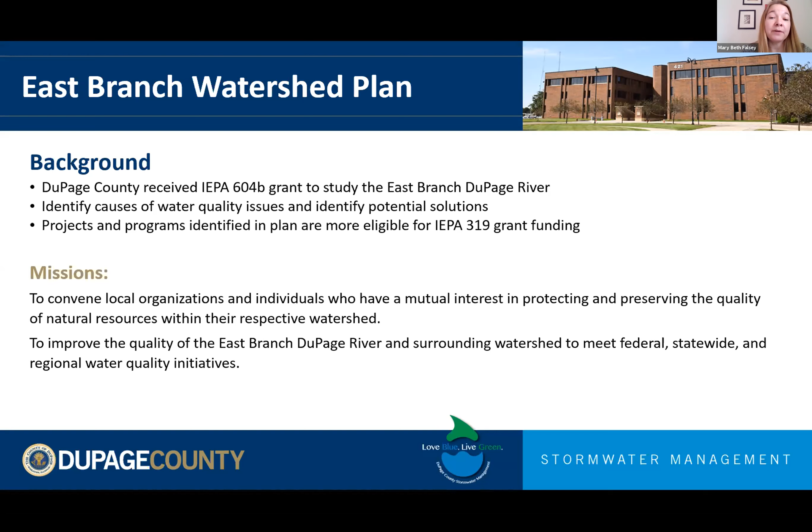Now, these projects and programs identified in this East Branch Watershed Plan will be more eligible for 319 grant funding. The mission of all of our watershed plans is to convene local organizations and individuals who have a mutual interest in protecting and preserving the water quality of natural resources within their respective watershed. Specific to the East Branch Plan, the mission is to improve the quality of the East Branch DuPage River and surrounding watershed to meet federal, state, and regional water quality initiatives.

The plan should involve an educational component. We track the progress of the plan implementation by using a project schedule with milestones and indicators. There's also a monitoring component moving forward to ensure that the plan is providing a benefit to the waterway.

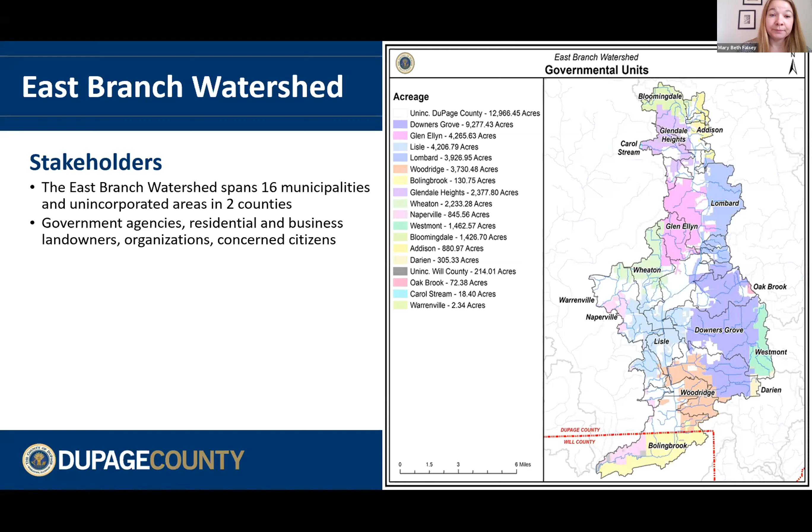So here is a map of the waterway itself. It flows generally from a north-south pattern through DuPage County into Will County. The East Branch DuPage River meets up with the West Branch DuPage River in Will County, and then the DuPage main stem eventually flows to the Des Plaines River.

So the EPA has identified causes and sources of the East Branch impairment, which I'll go over in the next few slides. But the watershed planning process also involves conducting intensive field investigations to gather information on additional causes and sources of the impairments that may not be listed in the EPA's inventory.

This is achieved through conducting field inspections along streams, any lakes that are identified, and detention ponds, as well as conducting outreach to stakeholders who live and work along the stream system and the overall watershed. We also conduct water quality modeling to estimate the pollution from stormwater runoff, as well as the reductions that can be provided by any potential projects or solutions.

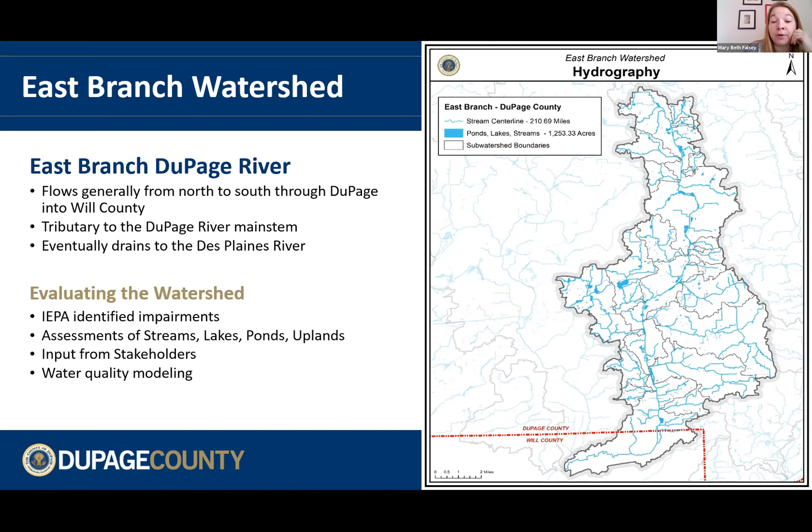So we look at the watershed in components, in smaller components. It gives you a better scale to look at things from a detailed perspective. The EPA had divided the main stem into segments or sections for evaluation purposes, so we use those same segments in our inventory. Again, we also look at each sub-watershed or tributary individually. So those are shown here as well.

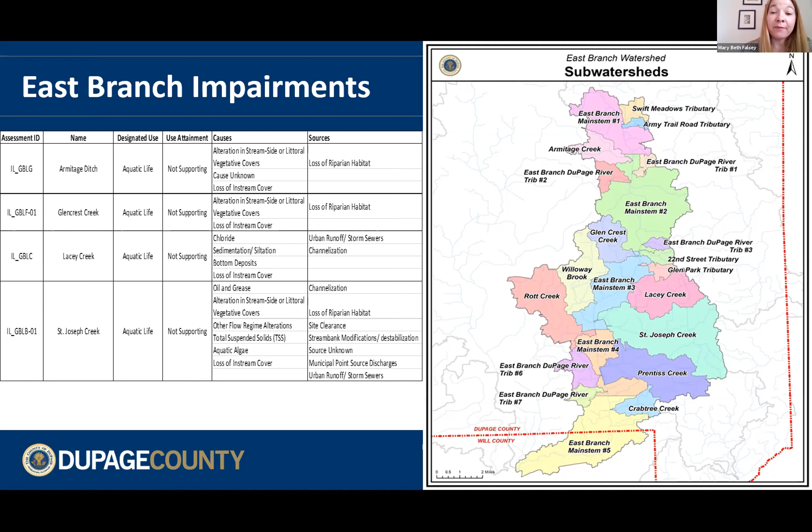So I keep mentioning the stream assessments—I'll go into those a little bit more. We're scheduled to conduct a thorough stream assessment of the East Branch and the tributaries in summer of 2020. This includes an inventory of stream conditions such as erosion, channelization, and sedimentation, as well as an assessment of the size and condition of the riparian corridor, and a habitat inventory.

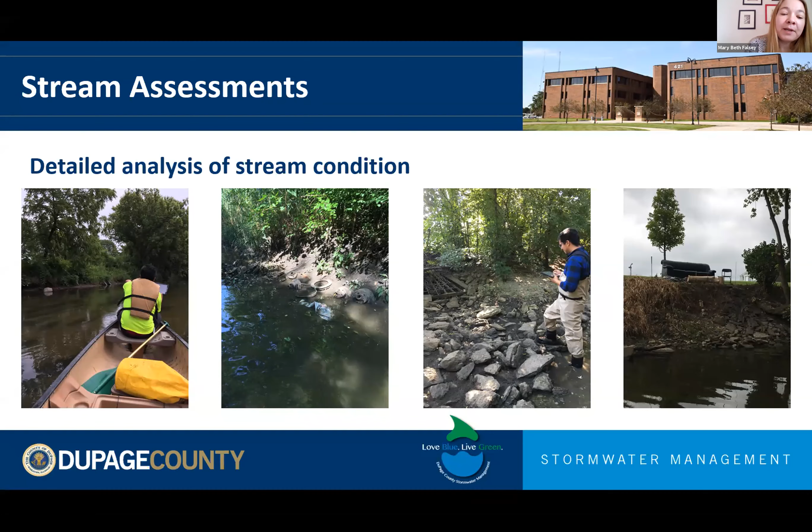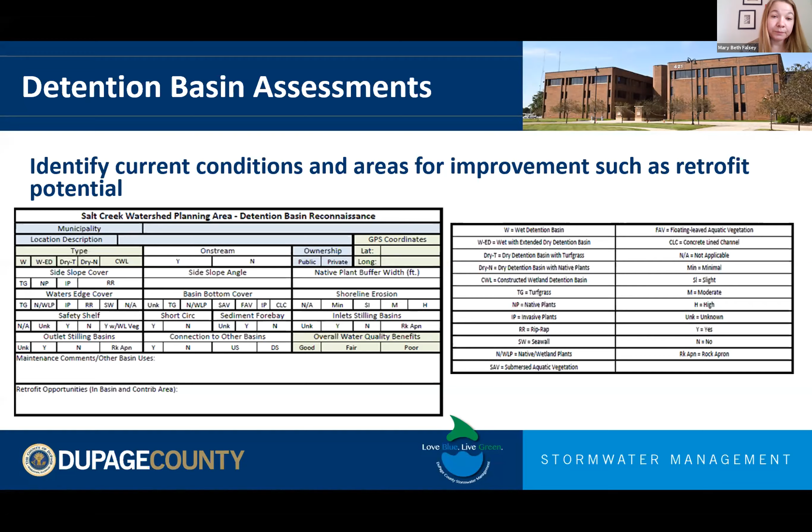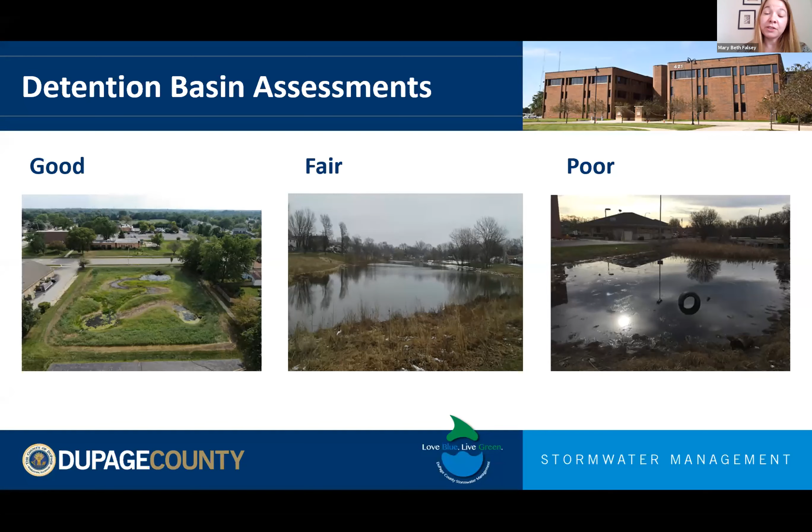Now on the other end of the spectrum, we have the poor quality basin on the right. A poor quality basin may have severely eroded shorelines contributing sediment, it could have garbage accumulation as you see here, or it could be vegetated with only turf grass, so you don't have a lot of interaction with the stormwater and the vegetation, and pollutants are not removed.

The Citizen Reporter app is another way we gather information from our stakeholders. We have had this Reporter app in use for several years now, and we promote it in particular for our watershed plans to gather more information throughout the county. It's an online and mobile application to submit stream reports directly to DuPage County.

If you're reporting from a mobile phone, you can actually geolocate and report something. If you're on a walk, for instance, and you notice something, you can report it from right where you're standing. On a computer, you can enter an address or click on the map to identify an area. You can attach photos, and these reports go straight to DuPage County Stormwater Management.

In some cases we will address reports immediately, like a stream blockage or an illicit discharge that's causing an issue. For other reports, if it's erosion, we can include that in our watershed plans. We keep that data in a database and include it as an issue to be noted, such as an eroded stream.

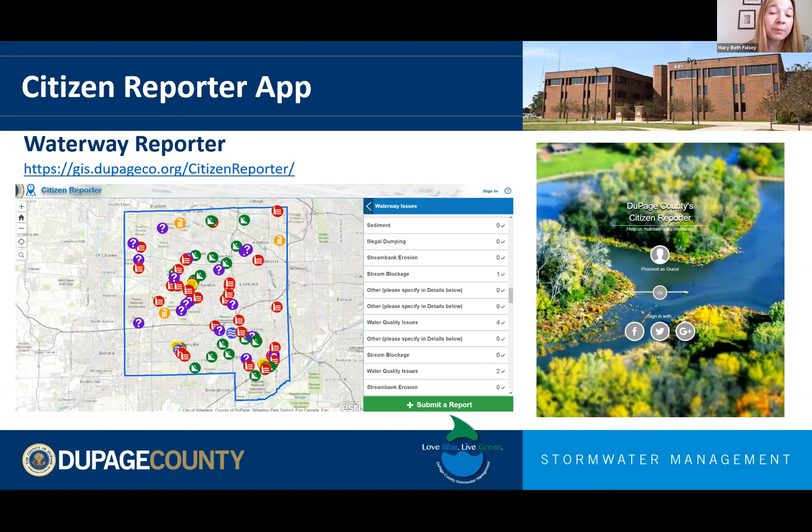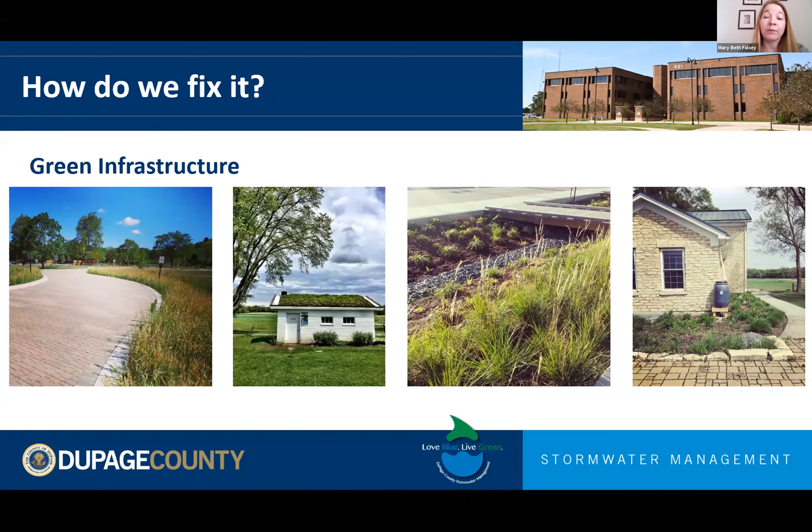So now that we've gathered all this information, how do we fix it? Possible solutions to water quality impairments can include green infrastructure in upland areas. I have a bunch of examples here, including permeable pavers, green roofs, rain gardens, bioswales, and rainwater harvesting techniques like rain barrels or cisterns.

Detention pond retrofits are a great way to turn something that may be a source of pollution into a solution. There are a few different things you can do with detention pond retrofits.

Shoreline stabilization is a good way to address an eroded shoreline, as you can see in this example. Stabilizing those shorelines helps keep the sediment in place. You can replace turf grass basins with native plants, or do a complete conversion to a constructed wetland basin, incorporating water quality features and constructing a complex wetland system at the bottom of the basin.

Stream and riparian restoration projects are another option. As we conduct stream assessments and find problem areas, we can identify areas to implement solutions, such as stream bank stabilization, whole stream restoration projects incorporating micropools and habitat features within the stream, and riparian plantings.

And as I mentioned earlier, it's not just on-the-ground projects—education and outreach should also be included. That can include programs such as storm drain medallions, rain barrel programs, pet waste cleanup outreach, and promoting and educating on native plants.

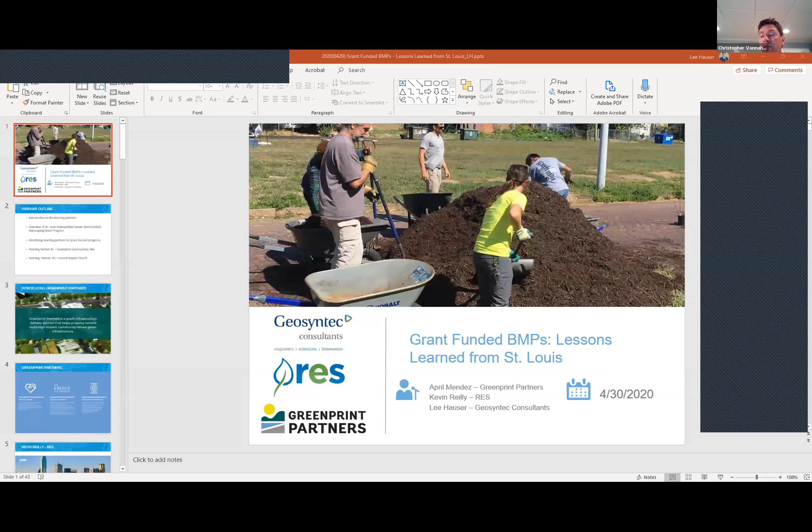Now we're going to turn things over to, looks like we got a trio of presenters for our next presentation, and they are Lee Hauser from Geosyntec Consultants, April Mendez from Greenprint Partners, and Kevin Reilly from Resource Environmental Solutions. And they are going to be telling us about grant-funded best management practices, and these are lessons learned from St. Louis. So guys, take it over. I'm not sure who's going first.

Thank you, Chris. Yeah, I can start. So today's presentation will be a joint presentation with April Mendez from Greenprint, Kevin Reilly from RES, and myself. We're going to talk about grant-funded BMP projects and lessons we've learned from those. Throughout the presentation, we're going to give an introduction to the teaming partners, walk through what all of the different consulting groups can help with, an overview of the St. Louis Metropolitan Sewer District's Rainscaping Grant Program, identifying teaming partners for the grant-funded programs, and then walking through two case studies where we have either implemented and designed BMPs, and the second one is still part of the design process.

April? Hi everybody, my name is April Mendez. I'm with Greenprint Partners, and we are a company based in Chicago that's exclusively focused on green stormwater infrastructure delivery. The aspect of our work we're going to be talking about today is the work we do to help private property owners build green infrastructure that is high impact and driven by their community stakeholders. We are a mission-driven company. We believe green infrastructure can transform communities, so our mission is to build more green infrastructure, better green infrastructure, and green infrastructure that serves all people. As part of that mission, we're backed by the Kresge Foundation through their Urban Equity in Water Systems program, and we are a certified B Corporation, which means part of our corporate structure is that we are focused on impact and measuring our impact.

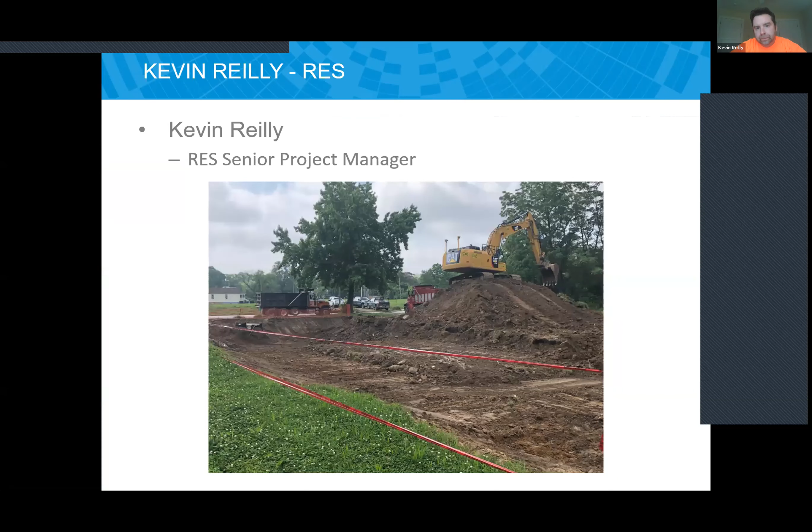Cool. Kind of talking to Geosyntec Consultants, we are an environmental engineering consulting firm. Within that, our group focuses on water and natural resource services, including both stormwater planning and design and Clean Water Act compliance. So we do a range of different types of green infrastructure planning, stream restoration, permitting, combining that with Clean Water Act compliance, nutrient reduction, lake management, and additional wastewater treatment support.

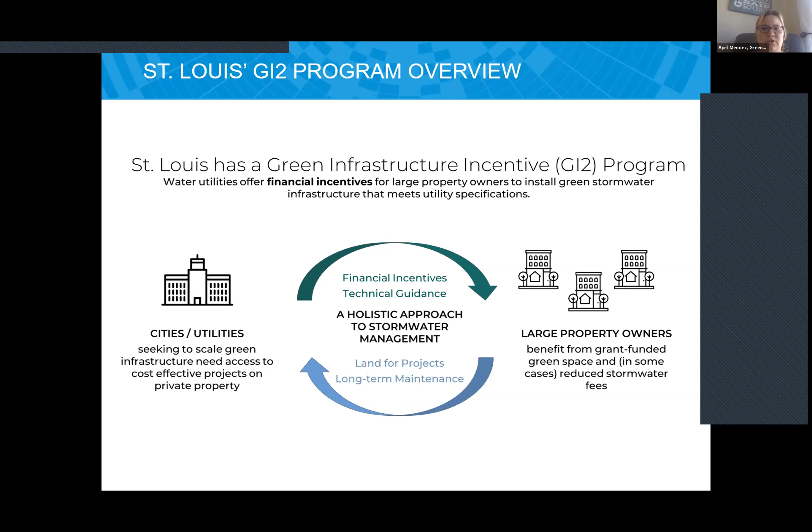So we'll move into an overview of what the St. Louis MSD Rainscaping Grant Program is. The St. Louis Metropolitan Sewer District has a consent decree that requires them to spend $120 million on building green infrastructure on private properties, off right-of-way properties. They have turned a lot of that into a green infrastructure incentive or grant program, a category of programs that exist in a number of municipalities and utilities across the country, where the utility offers a financial incentive to get large and small property owners, including residential, to install green infrastructure on their own property and act as part of the distributed infrastructure network for stormwater management. It's a way to bridge the needs of the utility in terms of providing stormwater infrastructure and the owners of the land assets, and the financial incentive helps bring those two together such that the utility can essentially be building infrastructure on these private properties.

There are lots of cities across the country that have a green infrastructure grant program. The four that are listed here are the most robust of those.

Philadelphia has an annual budget of $25 million provided for green infrastructure grants. That funding may go down this year in a COVID-19 world. They pay somewhere in the range of $150,000 to $200,000 per greened acre, and in exchange for the landowner building the green infrastructure on their site, they get a bill credit on their stormwater utility fee of up to 80%.

In the Philadelphia case, the landowner is committing to build the green infrastructure and then to maintain it for a minimum of 45 years. There's a maintenance easement placed on the deed of the property such that any future buyers would also have that same maintenance restriction. That is something that exists across all of these programs.

In the example of St. Louis, they have $120 million total dedicated to this over about 23 years. It's a kind of a spend-down program. They're allocating about $5 million a year, give or take, and they're not terribly strict on that. Their reimbursement level is about $180,000, but it can go up above that as well. And the maintenance requirement on the landowner is permanent, so as soon as you've installed this, you have to maintain it in perpetuity.

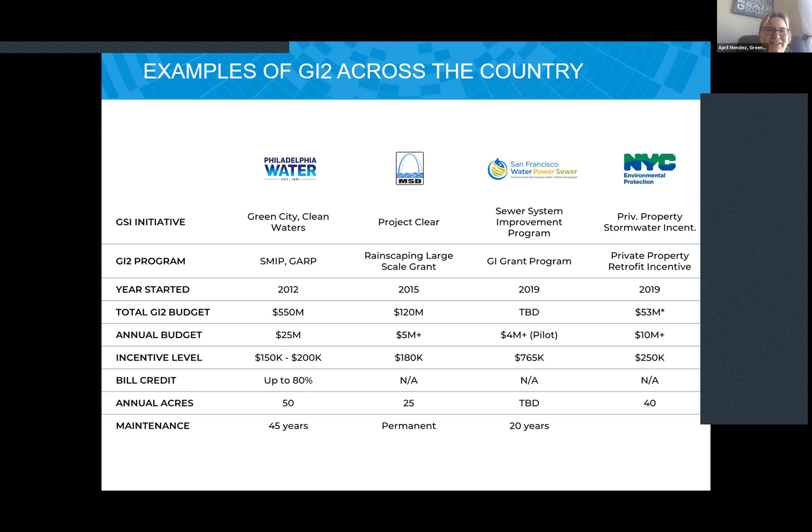New York City also has a private property program. You can see some details of that here. It's about $10 million a year, and they're paying about $250,000 per acre. It looks like I forgot to add the maintenance duration there, so we'll come back to that if you need it.

So then I want to talk about what the role of Greenprint Partners has been in these incentive programs, particularly in St. Louis, though our model is pretty similar in each of the cities we're working in — St. Louis, Philadelphia, and San Francisco at present.

Our role in these projects is, oftentimes, the utility doesn't have the capacity to go out and directly recruit landowners to participate in their grant program. So the folks that come to them proactively are people who already have capacity, who are maybe already planning a project, who already have design engineers at the ready, but anybody who isn't in that position is not going to respond. So we play a kind of middle person role, going out and recruiting landowners, and we particularly bring a focus to low and moderate income communities, given our mission focus.

One of the things we're trying to drive is more equity in the ways investments in stormwater infrastructure are being made, so that those investments go into the communities that will benefit the most or need them most. So we recruit the landowners, then do pretty much everything in terms of getting ready to apply for the grant. The landowner provides input and guidance on the design, and signs off on the requirements, saying this is something they definitely want to do and that they're on board to maintain the BMPs once installed. Then we submit the application on their behalf.

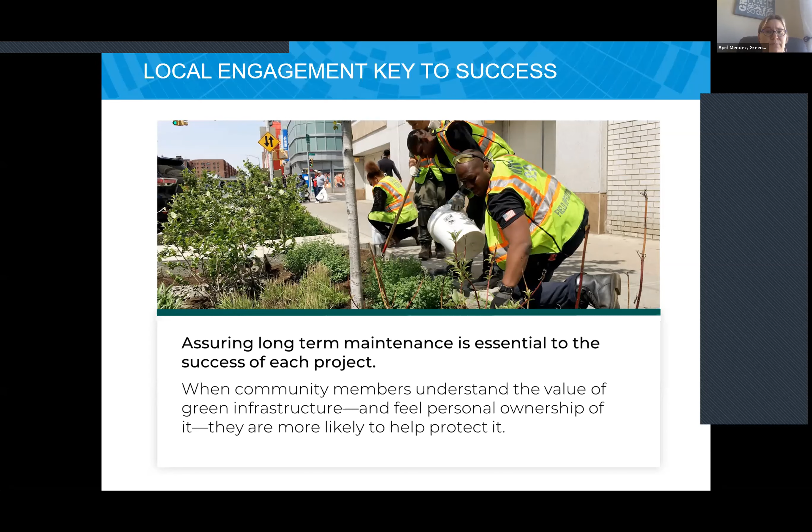All of that leads to a full process in terms of our engagement of stakeholders that starts at the very beginning with awareness building and getting key decision makers and a broader community of stakeholders committed. Then we also do a benefits-driven design workshop - a more in-depth opportunity for not only the landowner, but also their stakeholders, which might mean, in the case of a church, a full congregation - where we'll do education about what green stormwater infrastructure is and a deeper dive into the benefits they would like to see achieved through the design.

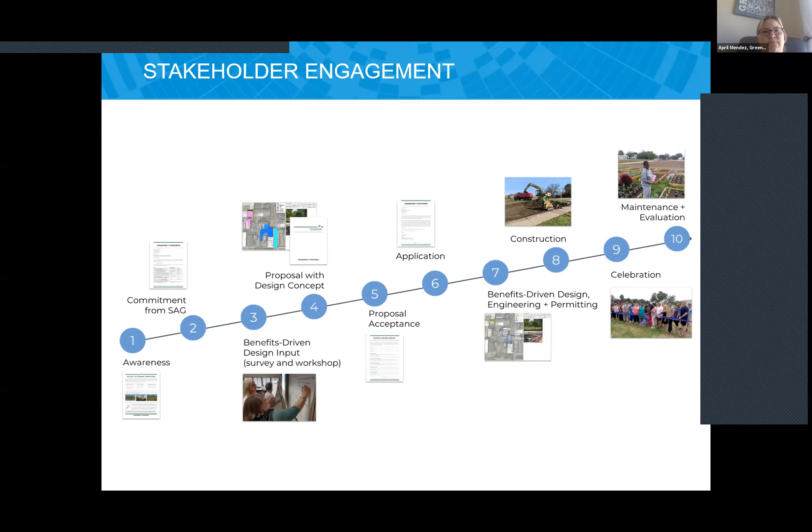I'll skip forward to a couple other community elements. Once we get through to construction, we work with the landowner to do a public celebration. They've also gotten some communication support from us throughout - press releases, social media bites, etc. - so that they're able to bring their whole community along throughout the entire process.

Thank you. So moving forward, we'll now talk through these two sites in St. Louis. The first teaming partner was the Greenprint community site.

This is a site that our nonprofit affiliate, Greenprint Communities - we're Greenprint Partners, Greenprint Communities is our nonprofit affiliate - purchased this property in order to transform some vacant land that was owned by the land bank, the Land Reutilization Authority, into a public space amenity.

The stakeholder advisory group for this project was a pretty broad coalition of folks, including the Aldermen, the Green City Coalition, which is a citywide coalition advocating for better green space use, the Land Reutilization Authority, which is the land bank, and then some homeowners associations and block club groups that we worked with as well to get their input on the design of the site.

What makes it a little difficult here is you're only dealing with a set amount of dollars in terms of reimbursements from MSD. So you're trying to do a conceptual design that you think will cover yourself as you move further down the line. But there's that push-pull of not investing fully in a full design survey if you don't know the project will be funded. So it's a balancing act, but working with Geosyntec and Greenprint, I think we pulled it off well.

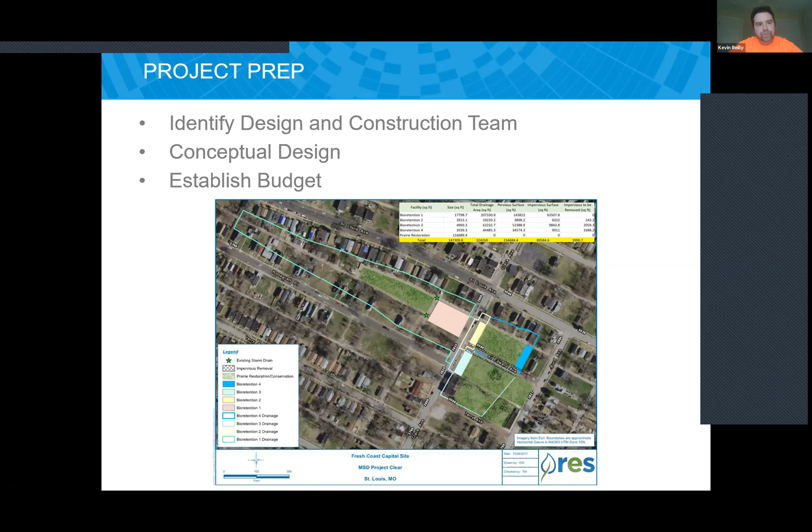So the two main agencies we're dealing with are St. Louis MSD, which is the sewer district, and then the city of St. Louis, their Board of Public Service.

Once you start manipulating the public right of way, and we are doing that where we're trying to convey water into these biofiltration basins, they have a strong interest, obviously, and it comes up in terms of where does their maintenance end and ours begin, and getting the permits to construct in the right of way, getting a special use permit for the site. It's zoned as residential, so proposing to put a biofiltration basin on these sites was a little bit of a challenge. Working with MSD is a more formalized process, and they've been down this road before.

The tricky part is that MSD will not move forward with approving your plans until the city buys in, and the city had a less formal process in terms of timelines and approvals, so that was a little difficult to navigate. They're still getting their feet wet in understanding these projects. We weren't the first to propose something like this, but we're definitely in that first group of about 10 projects, and the amount of drainage area we captured is one of the larger ones. There's been a few pilot projects with MSD and some city involvement, but the number of conveyances we had and the overall scale and scope was a little different for them, so it took more navigation through the city to get approved.

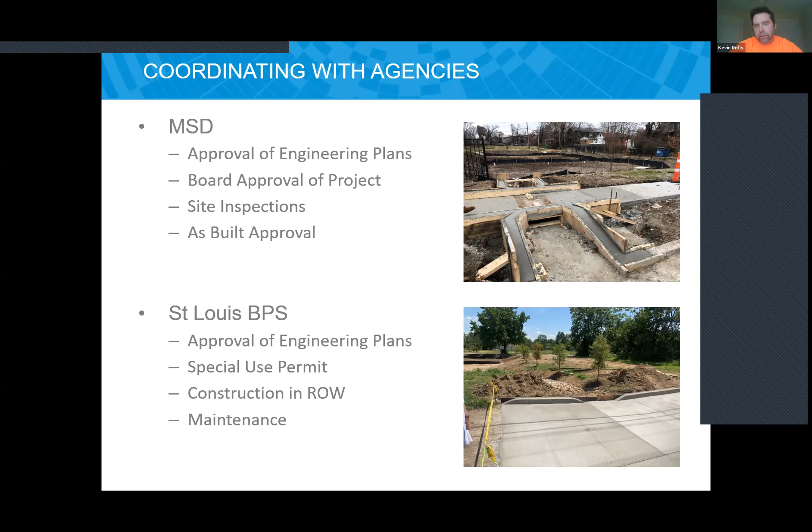Once your plans are set and everything's approved, you get to start making a mess out there. Here's a quick run-through of how a bio basin gets built in a city with a combined sewer overflow system. First, you're excavating and grading, getting your basins set and coming in to put in your sewer structures. You can see that area inlet in the top left acting as your overflow, tying back into the sewer system, so if we get a large enough rainfall, we're not flooding the adjacent lots and street—it all goes back into the sewer system.

After that, you come in and do your bioswale mix of 6 inches of gravel, 6 inches of sand, and 36 inches of soil mixture. We're planting and stabilizing that, getting our rock swales set, our forebays, and all our conveyances set, shown in the lower left. You can see how we repitched some alleyways—Lee will go into more detail on that—but the end result is the alley now drains to our basin.

In the bottom right, that's from last July, just after we finished the soil, forebay, and grading. You can see some plants in the midpoint of the basin that we were getting ready to install. That was last July, and I went out there yesterday—things are starting to sprout and look a little green, but not fully grown in yet. Give it another month or two and I think it'll be looking a lot better.

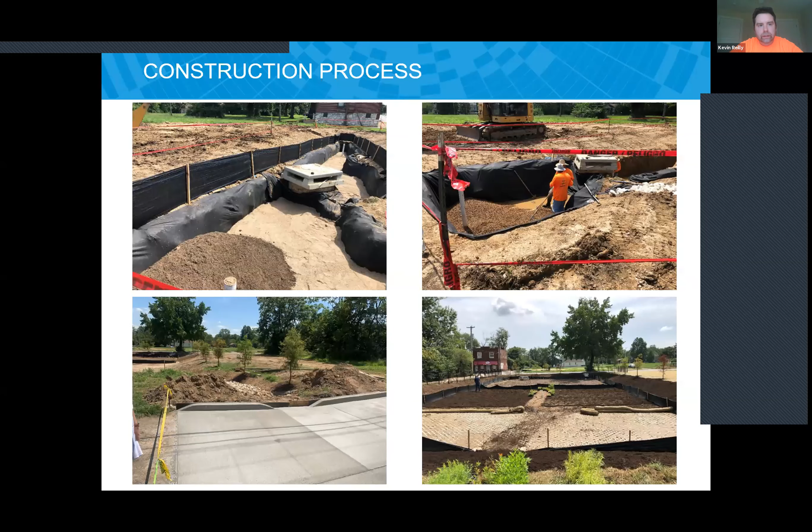We had to use the rational method to calculate peak discharge and what would be flowing into the basin. Outlet pipes had to be designed to flow 80% full during the 20-year, 20-minute storm. One thing with St. Louis MSD's maintenance rules and regulations is they have site-specific charts catered to them that you have to use—you're not recommended or encouraged to use NOAA. We're supposed to assume 50% impervious for residential, 100% impervious for commercial, and design overflow structures for the 100-year, 20-minute storm.

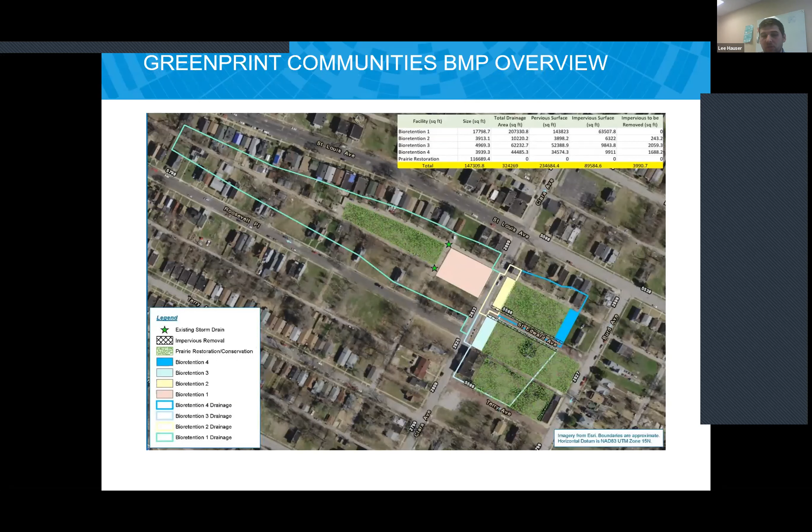Going back, as you can see, this area is heavily urban residential with a lot of open green space. Moving into that, we broke this site into 4 drainage cells.

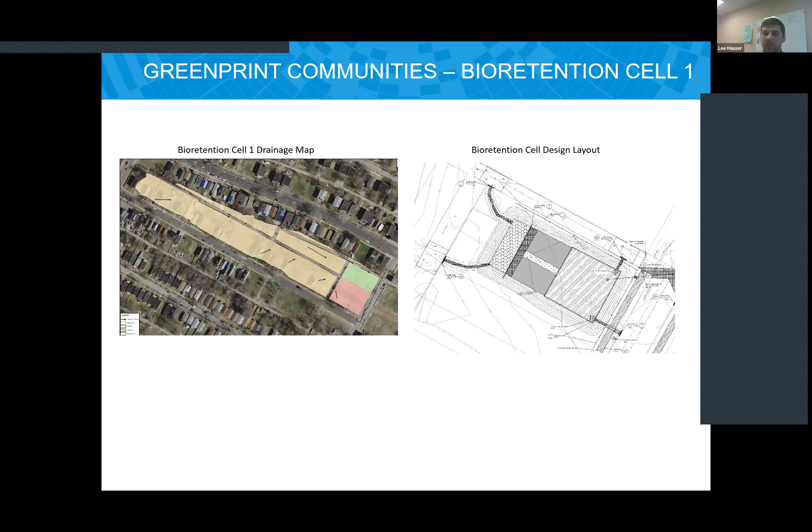So there's about 3.8 acres of residential and 0.8 acres of primarily right-of-way. On the right is our design. We designed small concrete ribbon swales to capture water runoff from the alleys, and then they would come into the bioretention cell via riprap swales, into a pre-treatment forebay, and then there'd be some large prairie grass that would choke that flow down and remove some of the larger material. Then there's a low flow stormwater conveyance channel that brought it down into what was the infiltration basin on the right side. There were also 2 additional inlets, from the adjacent road and another one downstream, and we would ultimately tie back into the combined sewer.

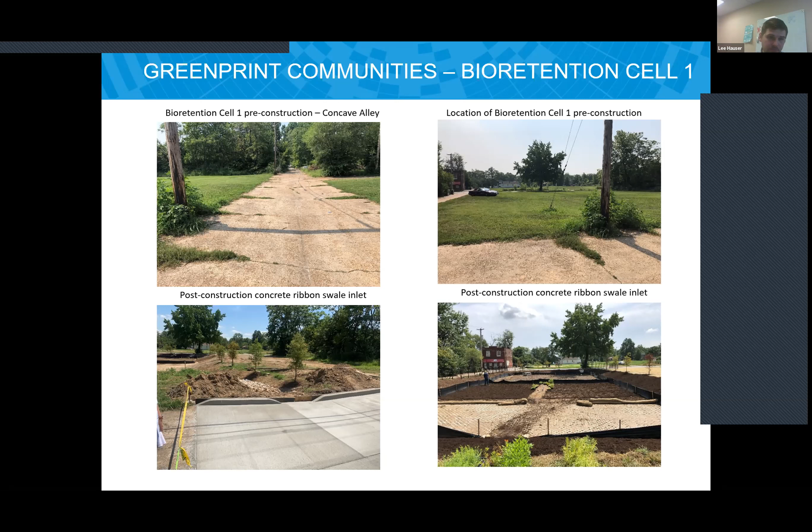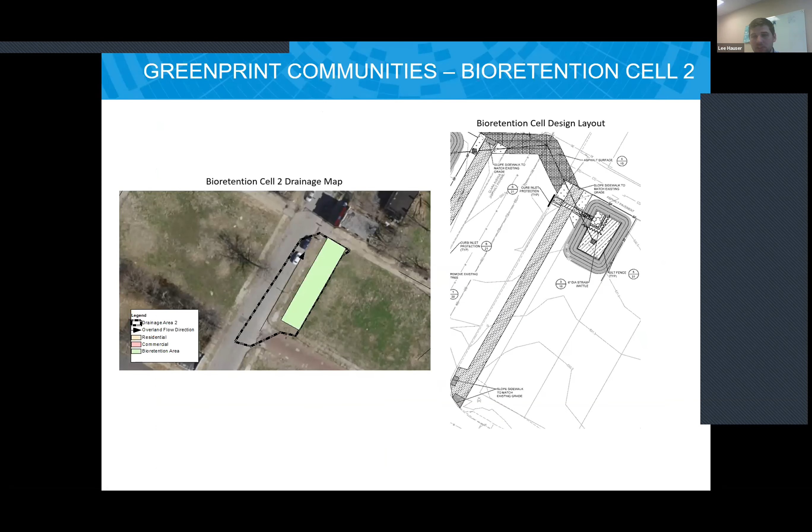Moving into the second drainage area, this one was much smaller, 0.16 acres with primarily all right-of-way contributing. So here on the right, you can see the bioretention cell is much smaller. One thing, when we originally started this design, we were trying to incorporate the entire parcel. However, with MSD's reimbursement, they will only reimburse for the water quality volume design, so we had to significantly shrink it and put it only in this small section.

With that, you can see on the left, this is the general existing conditions. As part of this design, we did have to replace this sidewalk. That was one thing St. Louis MSD had asked for as well, to make sure we're improving the community and really providing benefit for other people, since we're already going in and doing these designs.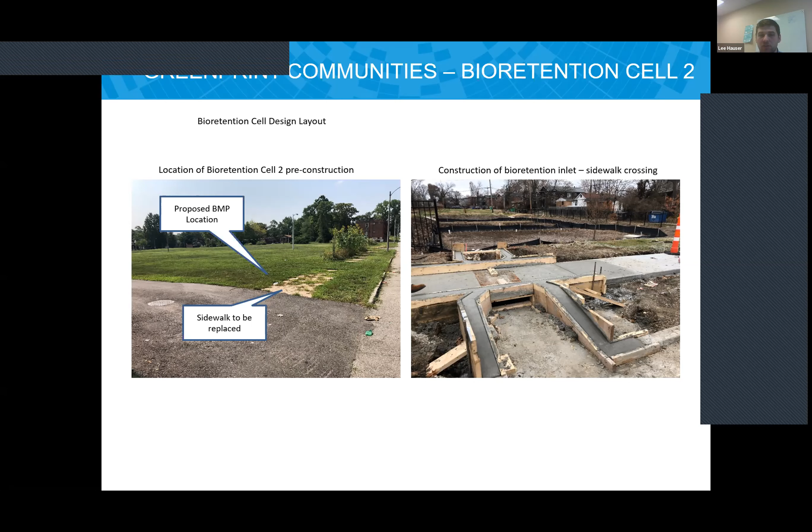Since the bioretention cell was not directly up against the right-of-way, we had to design a way to pull the water outside of the right-of-way and into the bioretention cell. So this is what we call our roadside curb inlet. Water would come out and pass under the sidewalk and then ultimately discharge into the bioretention cell through riprap armoring. Moving to the third drainage area, still made up of primarily residential, and there's actually some commercial here, which is just a building shown in that pink.

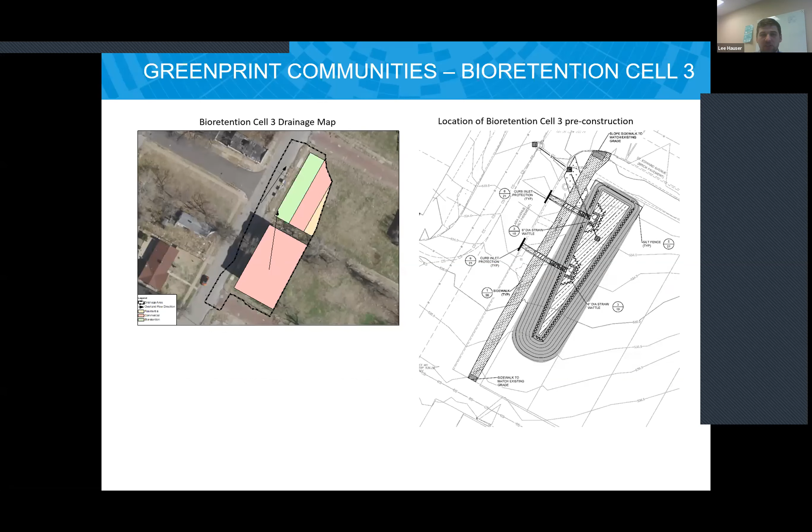Here again are before and after photos. On the left, we've got a lot of the open space, and on your right, you get a transition right after construction, and the bottom one is post-construction once the vegetation has started to grow.

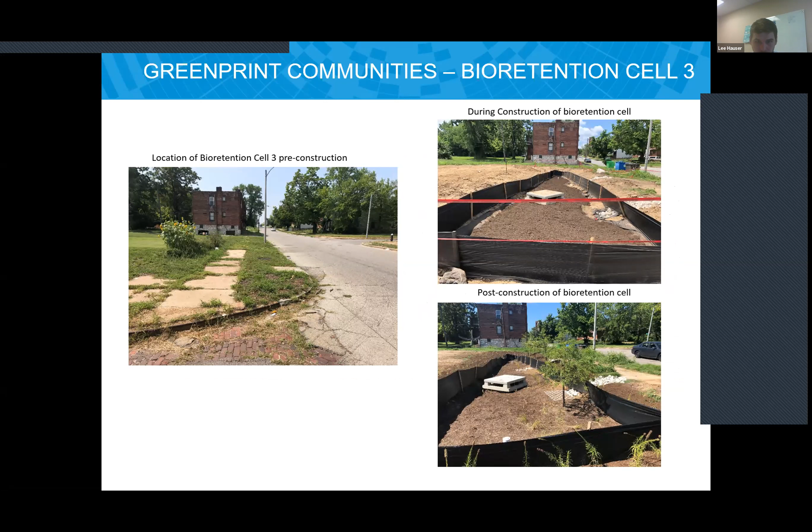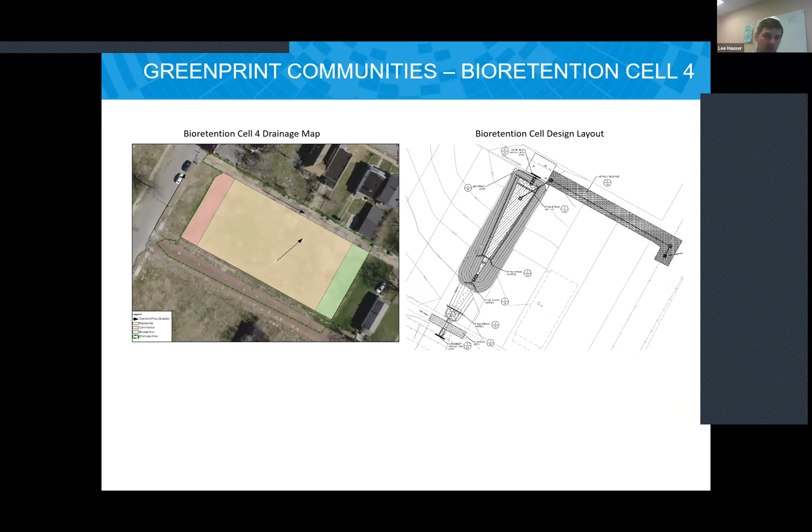Moving into the last one within this site, this is the second largest, about 0.84 acres, primarily made up of open space, or what was classified as residential, with a little bit of commercial on top. This one actually had 2 inlets on both sides of the alleyway, and you can see that here. Again, on top we have our existing conditions, or pre-construction photos.

In the top left, it's a brick alleyway. I've called out where the proposed inlet will be, and going down you can see that same concept from before, where there's a curb inlet that passes the water underneath the sidewalk and into the bioretention cell. On the right, we have 2 more photos.

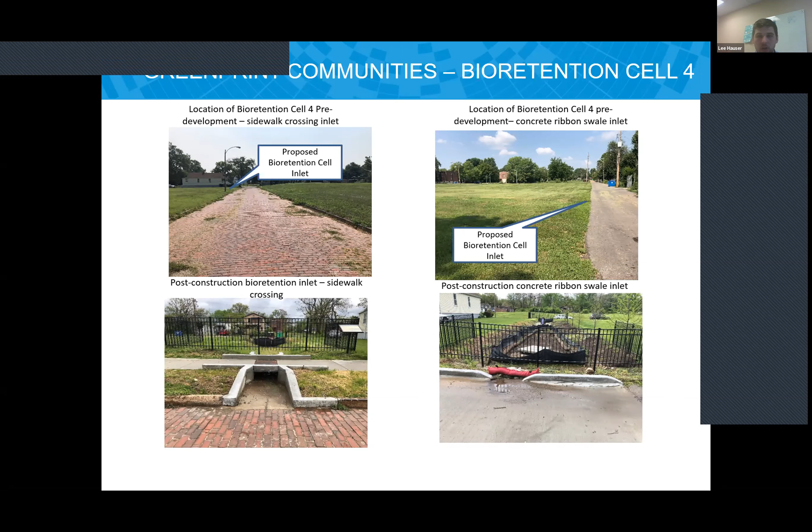The top one is pre-construction, where it's just an asphalt alley, and we would do more of the general concrete ribbon swales where we regrade it to pitch it in towards the bioretention cell. There's a riprap gravel apron that transitions into the bioretention cell. In total, we had 4 bioretention cells for this Greenprint community site, all varying in size. However, they all had that same general idea of really what was being designed to capture and convey.

This moves us on to the second teaming partner, which was the Central Baptist Church.

Central Baptist Church is the oldest historically Black church west of the Mississippi, located near downtown St. Louis, kind of midtown. The stakeholder advisory group is the board of trustees we've engaged throughout the entire design process, and the community has largely been their congregation. We did a benefits-driven design workshop for the full congregation, as well as educational videos to be shared during church services.

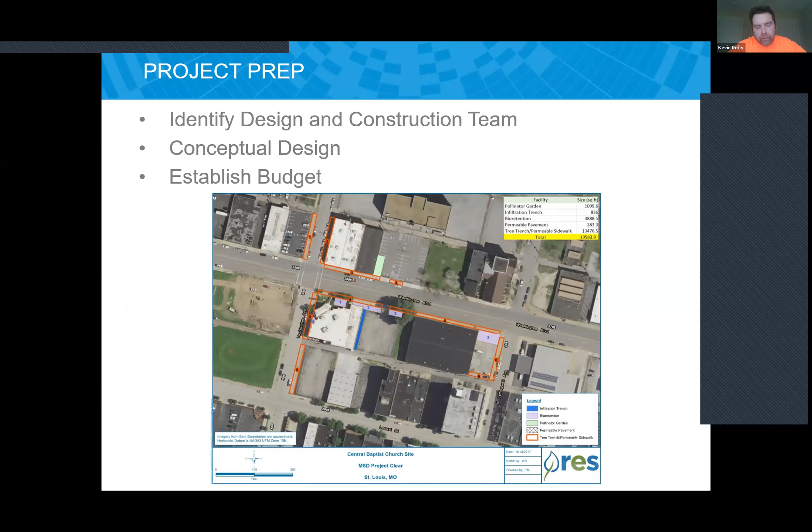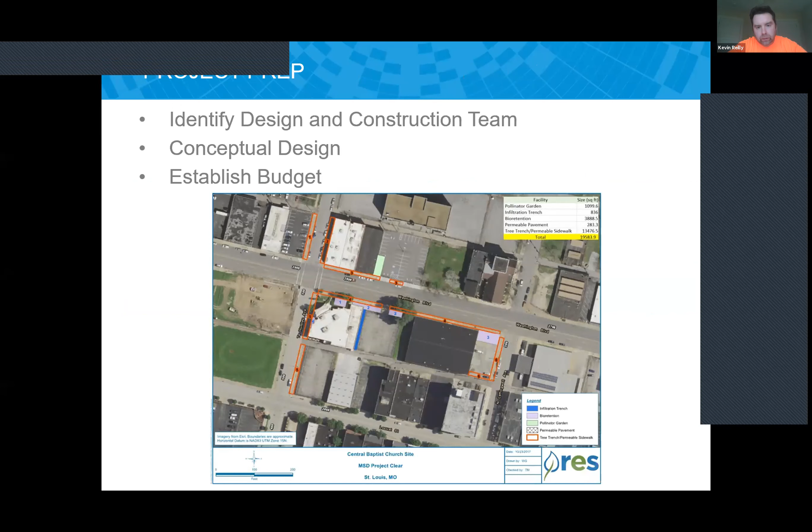Same process here, just a different site. We're dealing much more with pavement and sidewalk, not as much open green space. But same team - Greenprint brought us in, and we were working with Geosyntec to come up with solutions, same challenge of planning out on a conceptual level what we can do and move forward for funding. Same challenges with both agencies.

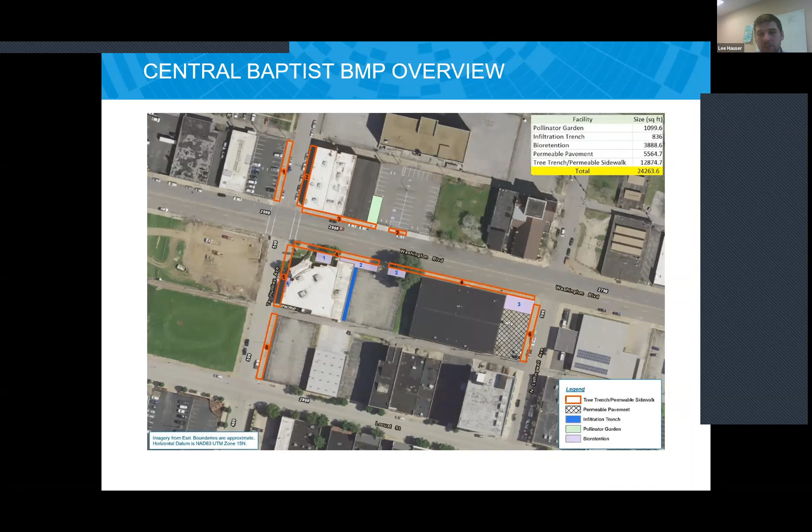So this is building on what Kevin had. Moving into the design, a lot of the same design approaches applied. However, we had to transition to being limited by the space, and with it being much more concrete and asphalt surfaces, the dollar value went up. So there were a lot of limitations in the size of the BMPs.

Here on the left is the typical detail of what the bioretention cell will look like. It'll be right within the right-of-way, butt up against the existing sidewalk, and then encroach into the roadway. When we met with the City of St. Louis BPS, they were big fans of building within the road, because this is currently a 2-lane road with already diagonal parking.

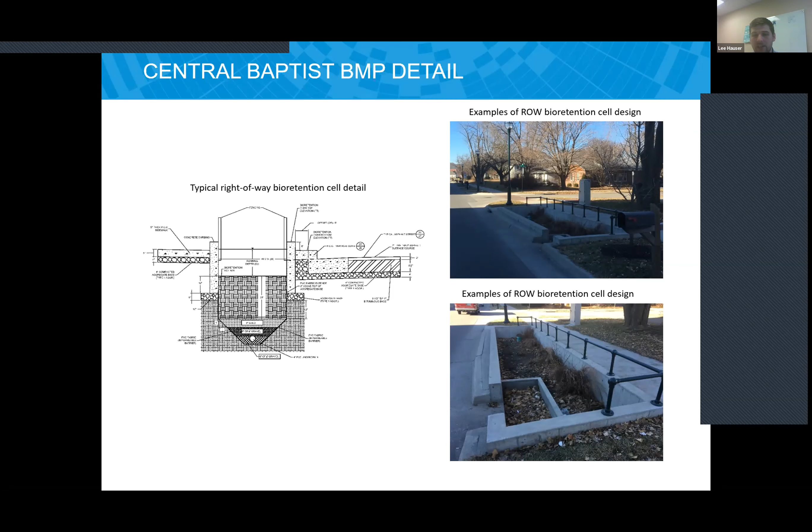So they were a fan of using these BMPs as a way to help with traffic control. Here on the right are 2 example photos I took to build on and give you that conceptual idea of what the BMP will look like. There'll be a sediment forebay where water comes directly off the road surface to act as pre-treatment, then overflow into the infiltration area where there's vegetation and things like that.

Here's an overview. The Central Baptist Church is this white building, and they also own these additional properties. On the north side, we had 2 BMPs that'll be encroaching in. One thing with this being right across from the church - there was a large recommendation that we don't remove parking spots, because this is the VIP parking area. So as we were installing and identifying BMPs, we were trying to reduce the overall footprint while still meeting that design green infrastructure intent.

Additionally, going back to the St. Louis BPS, they asked us to do a corner redesign, which was outside of the original design intent. However, we were able to work with BPS to make these corners ADA approved while still meeting that general design intent. These green areas on the right are where the proposed BMPs will go once implemented.

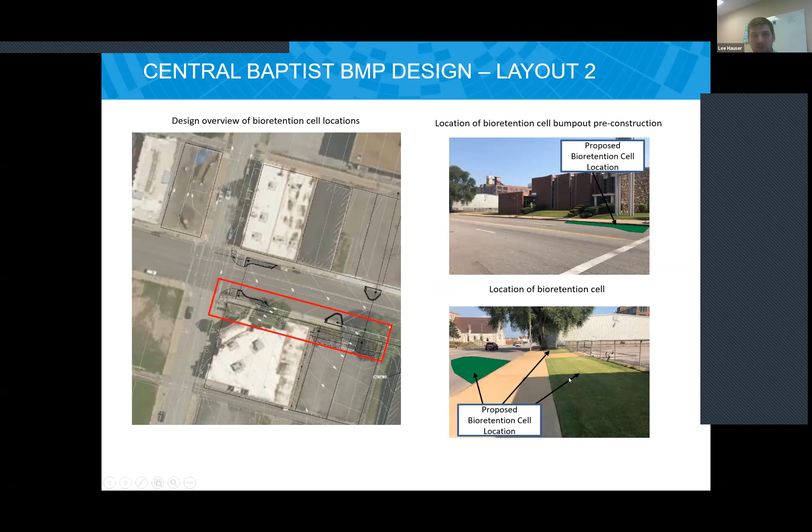Similar idea on the opposite side of the street - again roadside BMPs. However, there was a little bit of green space just adjacent to the church's parking lot, so we were going to do more of the original BMPs as presented in the Greenprint, with some grading and a more visually aesthetic BMP that also serves as a volume reduction.

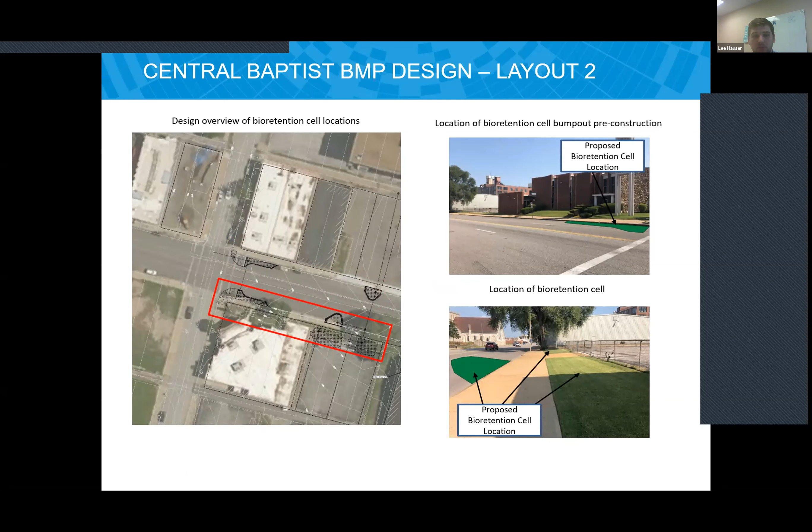So on the downstream or down-adjacent side, further southwest, the church owns a large vacant area, basically a parking lot. As you can see, the parking lot's not in the best shape, so this was identified as an area to remove all the asphalt and build a traditional bioretention cell with plants and other vegetation to create a visually aesthetic option, while also removing a lot of volume that would flow into the combined sewer system.

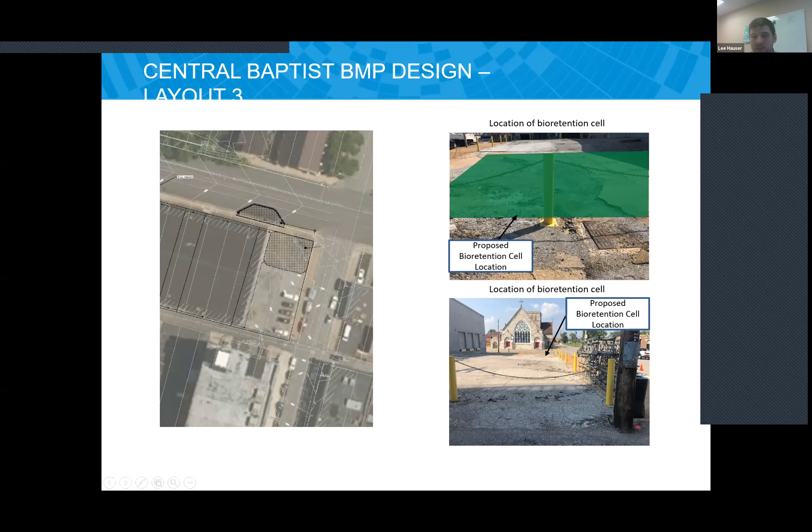So these are two pictures of where the bioretention cell would go, kind of down here.

Current status of the project is we're trying to get our final approvals. We've had lots of back and forth with MSD and St. Louis BPS, and we're pretty close to the goal line, but just not there yet. Unfortunately, COVID threw a monkey wrench in terms of timing and approvals and who's in the office to review plans. But I'm hoping within the next month or so we can get approved and start construction.

That photo there is just kind of the last linchpin in our way, and it has to do with trying to put in a speed bump in that alley so we can direct some of the flows we had initially calculated into that larger basin Lee was showing in that parking lot. That's the only thing holding us up right now.

So, lessons learned from the grant-funded BMP design.

One of those is coordinating the maintenance agreements and responsibilities with stakeholders, and conducting those maintenance activities and training with them. As April alluded to earlier, with green infrastructure there's a lot of additional need to make sure the community is bought in and willing to maintain these. It does take some training, since this might not be in their traditional background, so it's important to provide them an understanding of what really needs to happen to successfully maintain this green infrastructure.

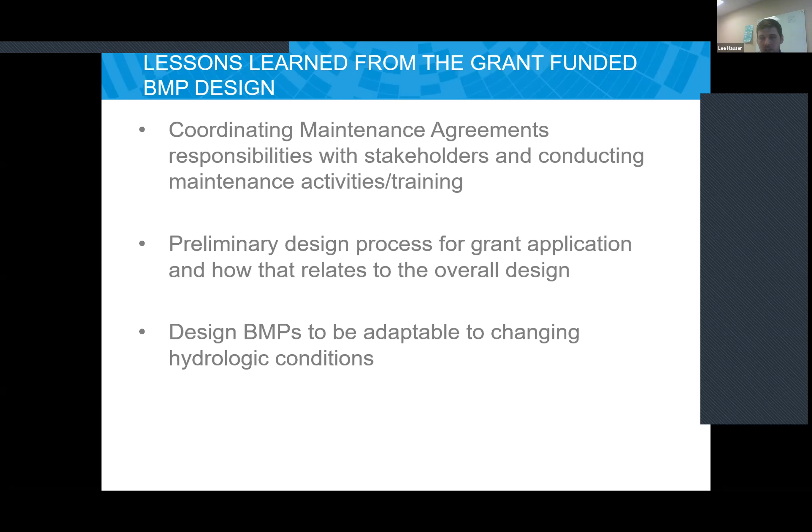The last lesson learned was the importance of designing BMPs to be adaptable to changing hydrologic conditions. We're all hopefully aware that we're seeing more frequent, heavier rainfall storms. One thing with this program is that St. Louis MSD does not provide any incentive or allowance for over-design to account for increases in rainfall depth. I understand these are grant funded, but there could be additional mechanisms to provide that incentive, say a match of some sort or a reduced cost in the storm sewer service charge. So it's important for these grant-funded programs to also provide adaptability to these increases in rainfall depths. With that, are there any questions?

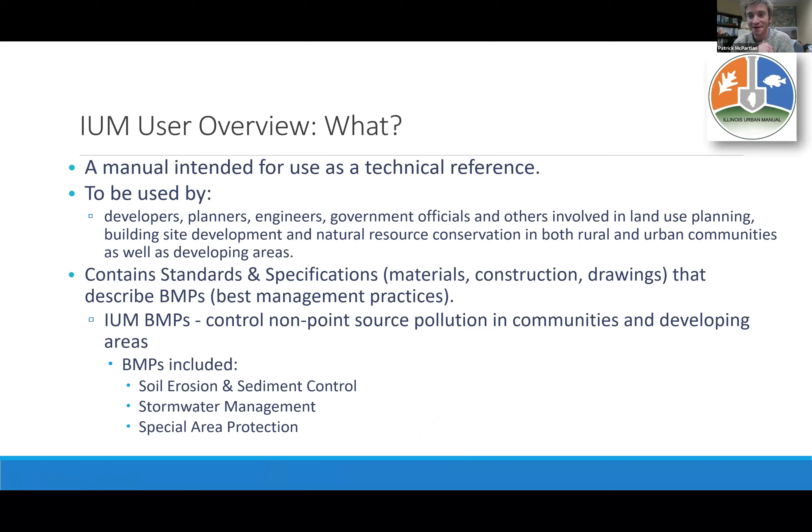Patrick, I took it over because your slides weren't advancing, so I'll go ahead and advance them for you, okay? Oh, that's awkward. Okay, Mike, right at this one.

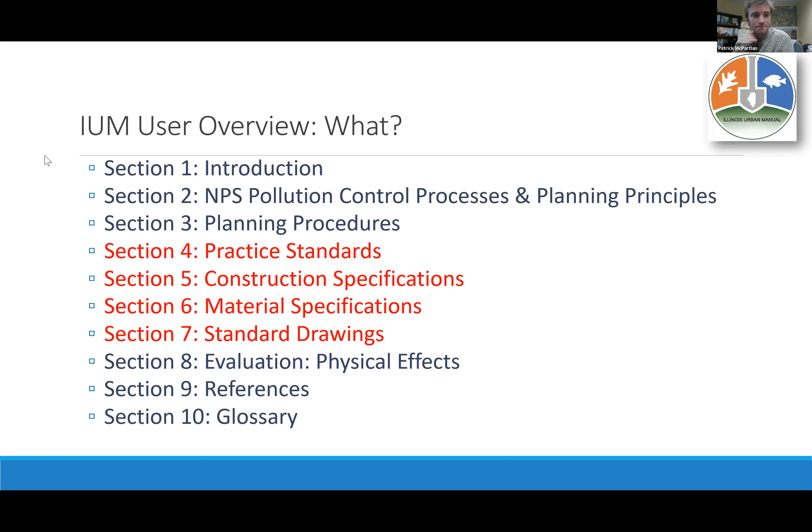Okay, so going further on the what - it is predominantly funded from IEPA grants. Like I mentioned, we did deal with a 604B grant last quarter, the 2019 round. And it's a cooperative multi-agency organization.

It consists of a steering committee, which is pretty much governmental agencies gathering together, trying to give unbiased opinions on things. And then we have a technical resource review committee, comprised of those public agencies, as well as professional consultants and engineers. Together we just formulate what needs to be done.

For the steering committee, more specifically, we have the Association of Soil Water Conservation Districts, so a lot of SWCD members, Army Corps of Engineers, IEPA contribution, Department of Transportation - IDOT - and we also recently had the Department of Natural Resources reaching out to us to reevaluate the effectiveness of erosion control blanket and its impact on wildlife long term. We were going to have a meeting about that, but with everything going on, we had to put that meeting on delay.

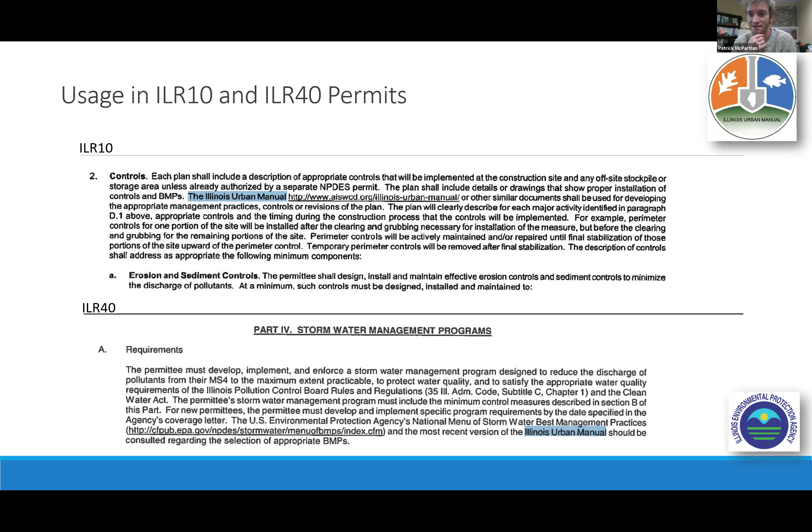So as a part of that last 604B grant, we did revise the website. Previously it was under the Association of Illinois Soil and Water Conservation Districts website, just a tab on their website, but now we have our standalone website, and we try to keep it as active as possible with the revised practice standards.

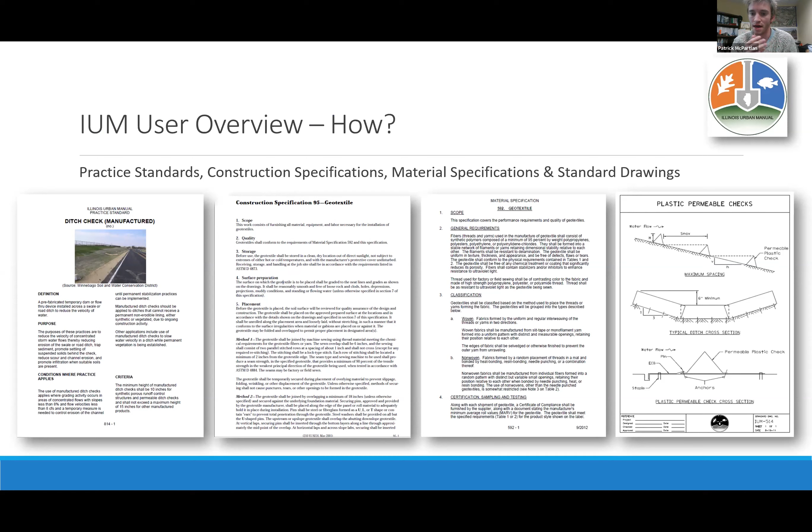And then pretty much an overview of the whole process, like what there is to offer. The most important things, honestly, are the practice standards and then the standard drawings associated with it. So in the practice standards, you'll get a definition of the practice, its applicable uses, and just general guidelines in terms of maintenance. And then we also have the corresponding standard drawings, which engineers could come to our website, incorporate into their stormwater pollution prevention plan, and then use as guidance throughout the life of the project.

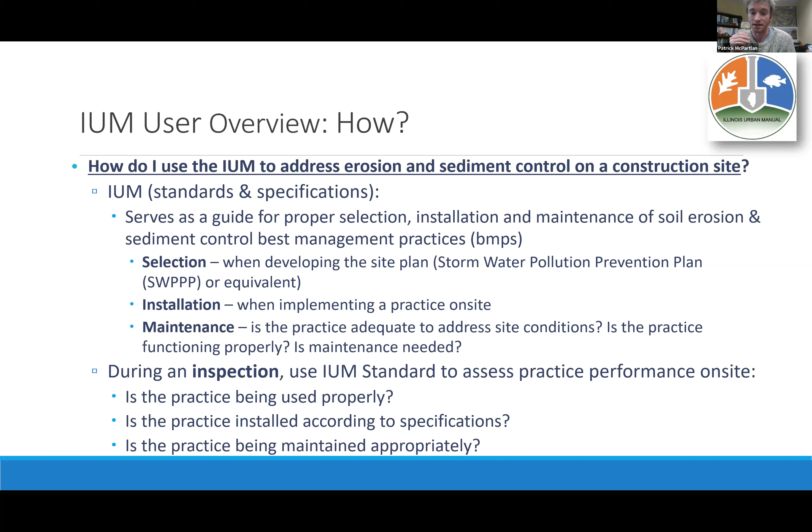And then how do you use it? Yeah, you go to the website and use that as a reference, and then you take it out to the field with you, and you make sure that the installation is proper, the maintenance is proper, and the selection meets the expectation. And then, is the practice being used properly? Is it according to specifications, and is it being maintained appropriately?

So what's new? This is that 2019 grant cycle. We sent out a request for proposal for the basin standards, sump pit, the temporary causeway, culvert inlet protection - I'll go into those further. And then within the TRC and the steering committee, we revised the dewatering standard, one that we use most frequently, definitely.

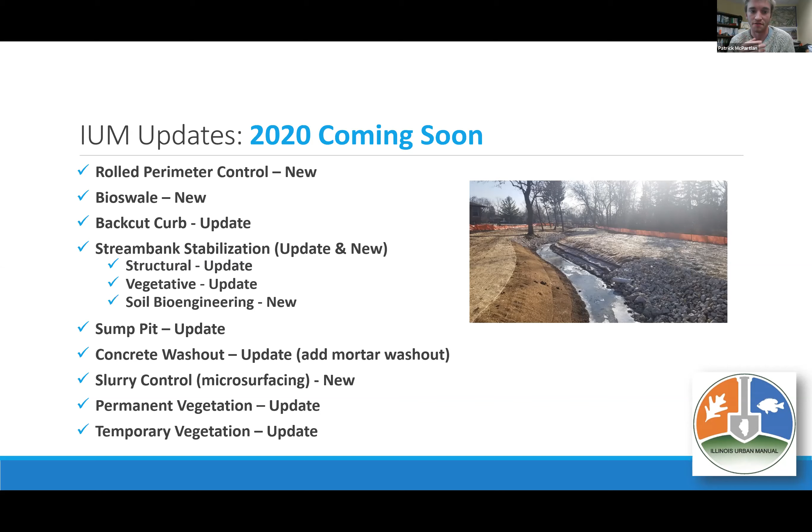So what is to come? This is what was part of our 2020 grant proposal. I'm sure some of you are familiar with that picture on the right there. That is the East Branch, and that's a project that we currently inspect on behalf of the Army Corps, and that's a great representation of a bunch of different stream bank stabilization mechanisms in place in order to stabilize that stream bank. So with that, we're going to look more into permanent vegetation, temporary vegetation, and different things that just need general upkeep and updates.

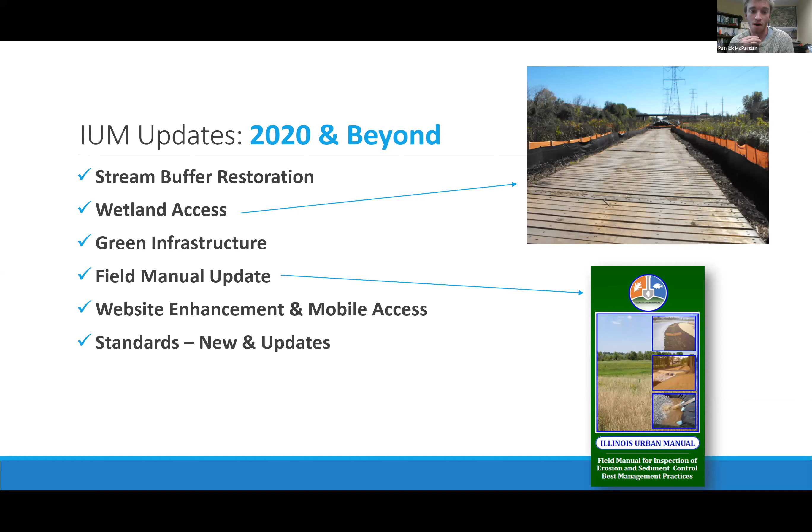And moving it forward, we're trying to get more of a green infrastructure focus and something that'd be more useful for watershed groups, because I know a lot of watershed plans have best management practices proposed, and we would like them to use the urban manual as a reference for stream bank stabilizations or maybe permeable pavements or other green infrastructure practices. We want to enhance the website, and we want to simplify that question-in-the-field to answer-in-the-field process. So you have a question, you go to the website, and hopefully get an answer by the time you leave the site. So yeah, we'll wait to see about that grant.

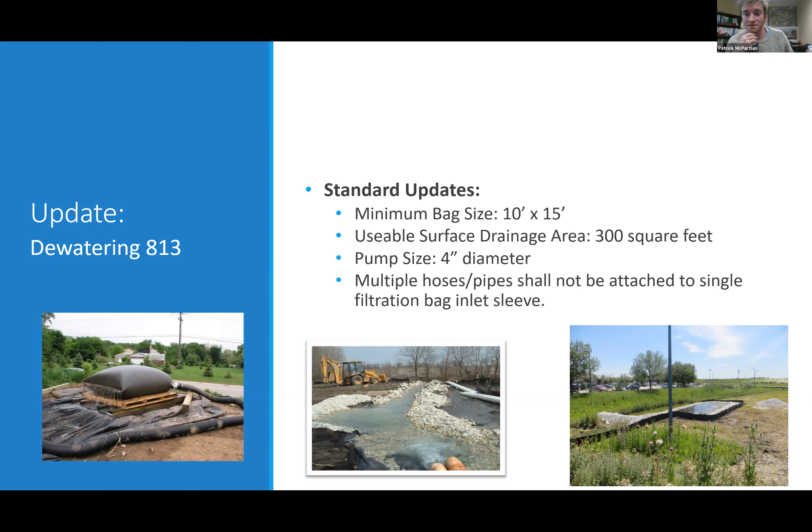Next, please. I'm going to dive into the RFPs that we got in return. Hey and Associates was the consultant that worked with us to make these revisions. Their role was to take a practice and try to standardize it as much as possible, so it could be applicable across a lot of different sites and different examples.

This is like what I was saying before, the bare minimum. You could enhance what's on here, but this is the minimum expectations we have when we're inspecting something like this. Next, please.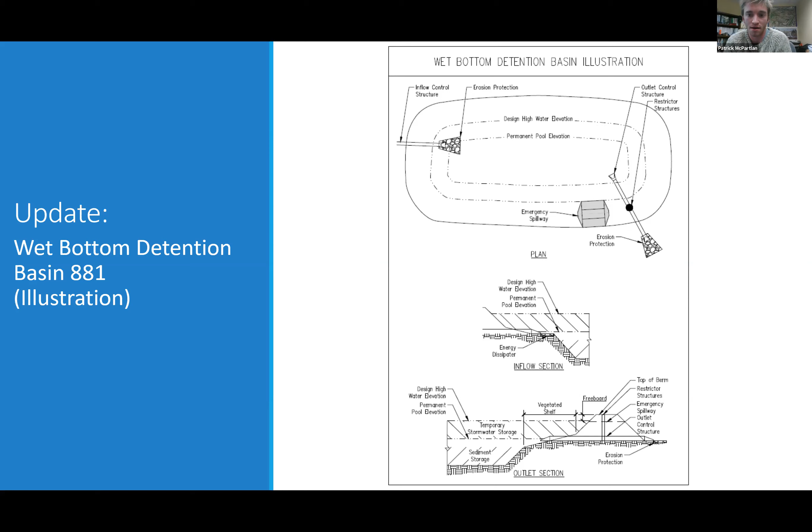Next one, please. The sump pit was also revised, so you see the standard drawing here. I like to think of the sump pit as kind of the last stand for most of these construction sites. You can see in this picture here that that's the final stormwater basin of the site. There was a lot of back and forth about this drawing and what is actually consistent with that bottom spec right there, with the riprap and the spacing.

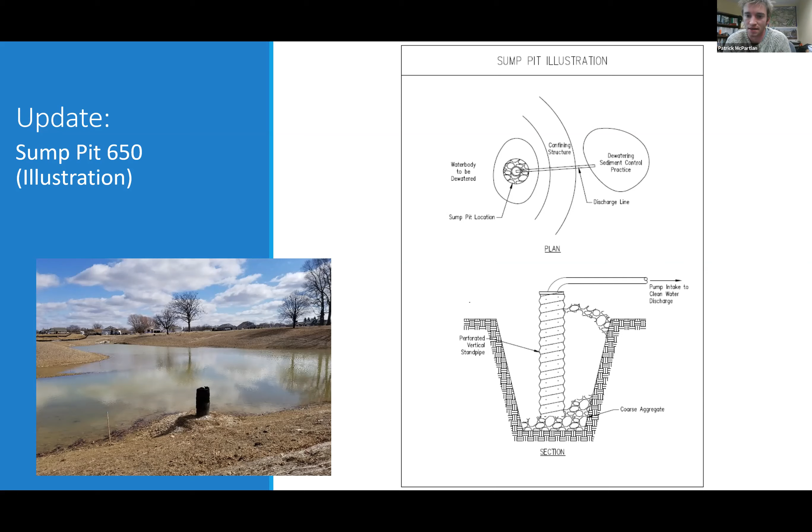Next slide, and then the sediment forebay. I don't see these too frequently, but it takes advantage of that spillway, and it really takes advantage of finding a capability of enhancing the settling time of the practice.

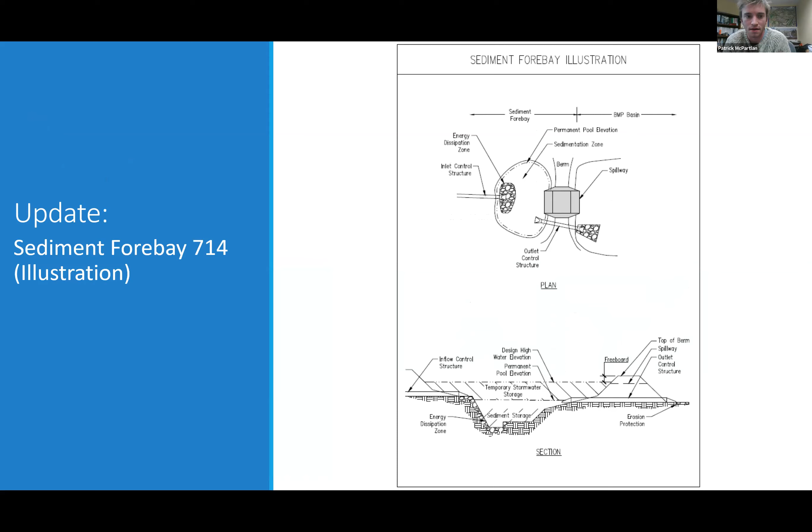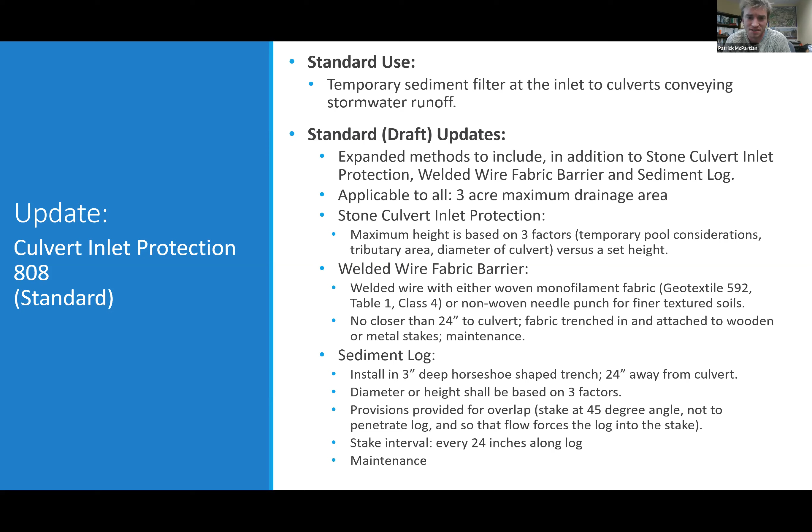Next slide. Culvert inlet protection, very important best management practice. You see its standard use, and the methods - there's plenty of methods to use it for. So it was really hard to standardize this practice, but as you'll see in that next slide, they did a good job of covering most of it.

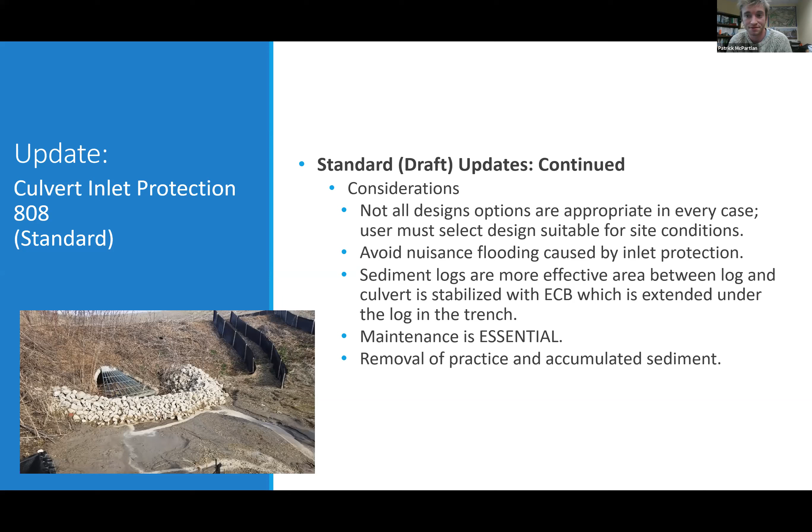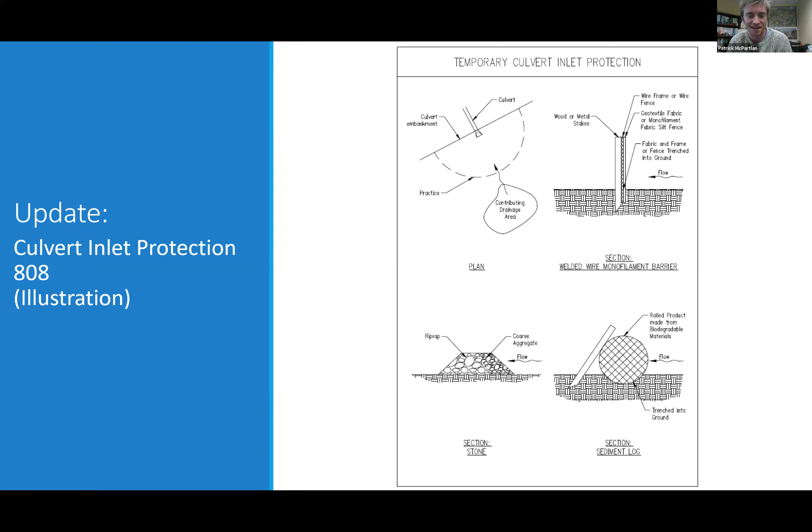Next one, please. This is the standard drawing that they came up with. As you can see, different options - you've got the stone, the sediment log, and then the monofilament barrier, which we don't really recommend in concentrated flows, but getting a little ahead of myself. I'm sure there will be a lot of back and forth for this practice, and looking forward to the public review comment period. Next slide, please.

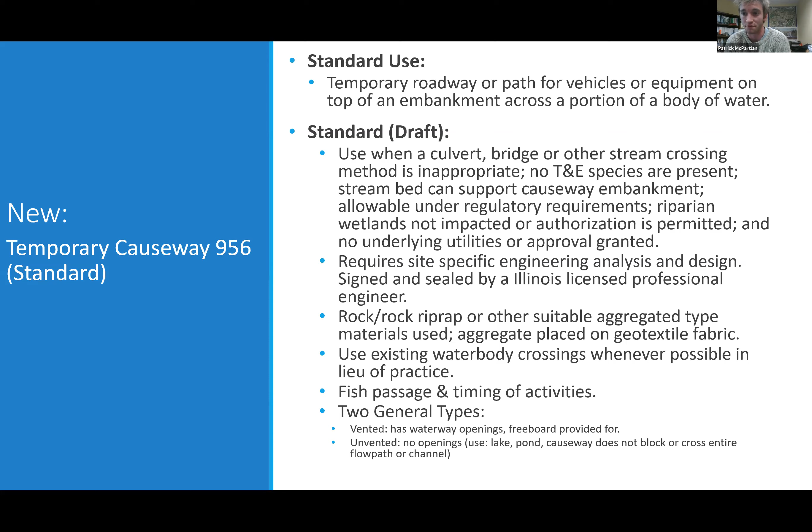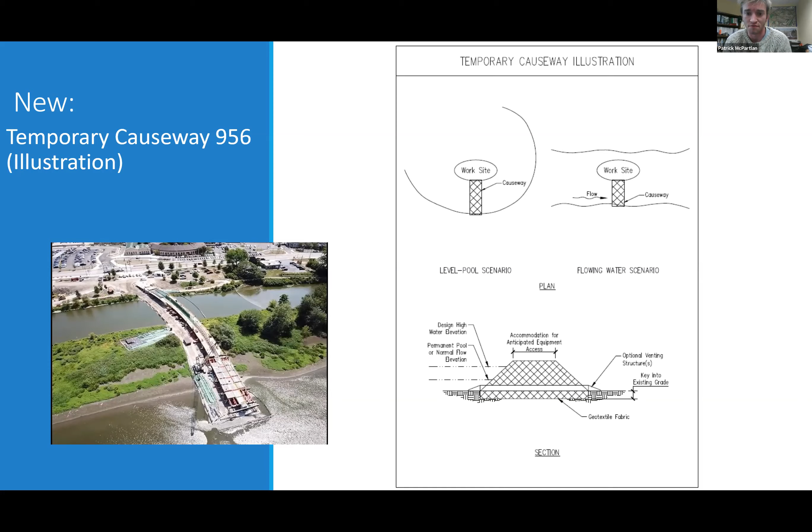They're constructing a pedestrian bridge across the Fox River. You can see they have their temporary work area, but you can't see in this picture that if it was zoomed out further, you'd see the other half of the river was unimpacted. At this point, they'll eventually flip to the other side of the river and move the causeway. You can see where it crossed, there are culverts in place with their temporary work areas, and the corresponding illustration that goes with it. It's pretty hard to standardize this stuff, but it's something to work off with.